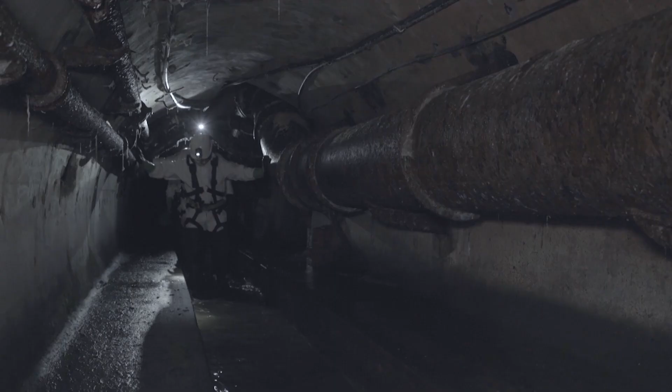This underground labyrinth spreads over 2,600 kilometers, the distance between Paris and Moscow. Hidden and mysterious, and completely unknown to most Parisians. It's a city beneath the city. Actually, underneath each street in Paris, there's a sewer that's accessible. It feels like entering the bowels of the earth.

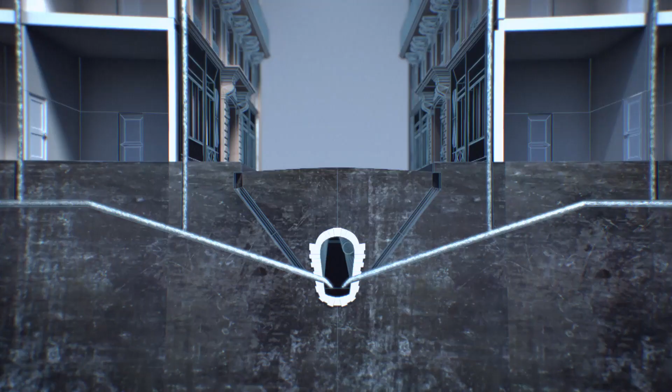Like the city above, the pipes below are always on the move. Every turn of a tap, every flush of a toilet, every minute of every day, Parisians depend on the waste they take away and the fresh water they provide. How does it all work so seamlessly?

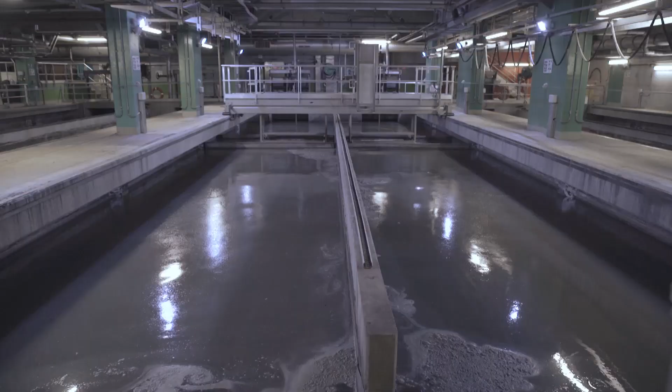Now, thanks to unprecedented access and computer-generated imagery, you're about to discover the secrets of the Paris sewers, where close to 6.5 million cubic meters of wastewater travel daily, equal to 70 Olympic-sized pools per hour. This massive infrastructure demands extraordinary equipment. From high-power flushing systems and huge reservoirs to century-old boats designed to clear sand.

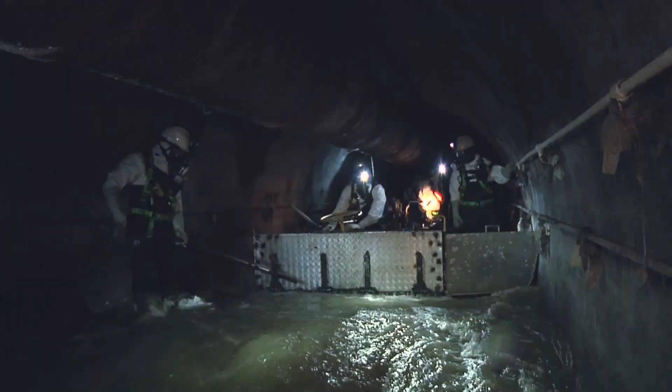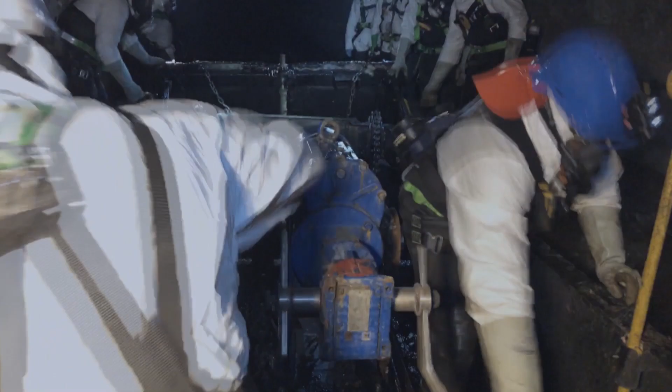The sewers are an undeniable part of the technical and urban legacy of Paris. The know-how and these extremely advanced constructions and machines have withstood the test of time. Since its creation in the 19th century, the modernistic sewers have transformed to keep pace with the vital city above.

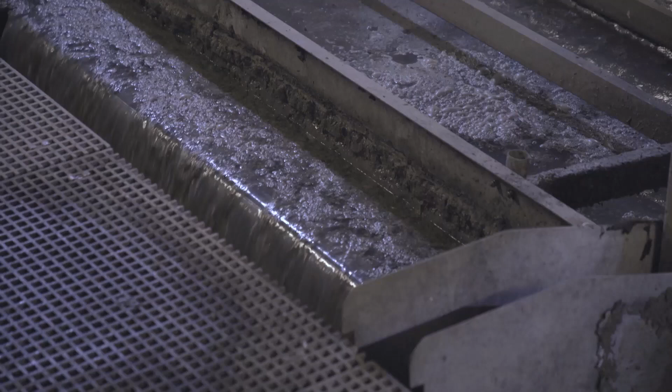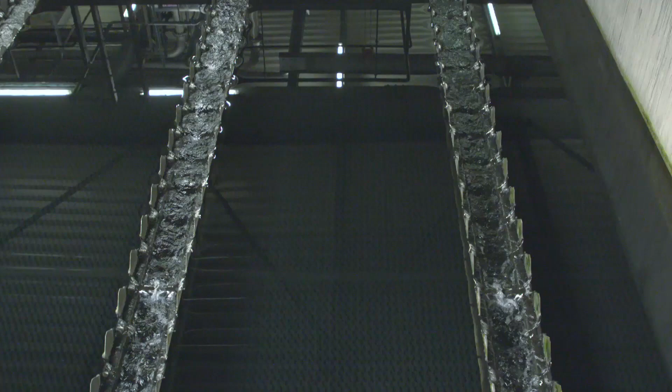Witness the elaborate techniques designed to deal with flooding, heavy rainfall, and provide high-speed decontamination. Nowadays, thanks to accelerated techniques used inside the plant, we're able to treat wastewater in just a few hours. From the collection of rainwater and wastewater to the distribution of drinking water, your sewer tour will take you on a fascinating behind-the-scenes adventure in history and technology. Deep inside the bowels of Paris, without getting your feet wet.

Every day in Paris, more than 2 million residents flush their toilet, clean their dishes and clothes, and take a shower. All this domestic water ends up in the sewers. This amounts to over 6.5 billion liters of wastewater that must be evacuated each day. Every hour, the equivalent of 70 Olympic-sized pools flows inside this invisible yet gigantic infrastructure.

In fact, the sewers are a network of tunnels mirroring the layout of the streets and boulevards above the ground. In total, 2,600 kilometers of galleries meander underneath the city. If they were put end to end, the sewers would cover the distance between Paris and Moscow. This extraordinary infrastructure serves several purposes. On top of collecting wastewater, these tunnels gather rainwater and prevent the flooding of Parisian streets when heavy storms occur.

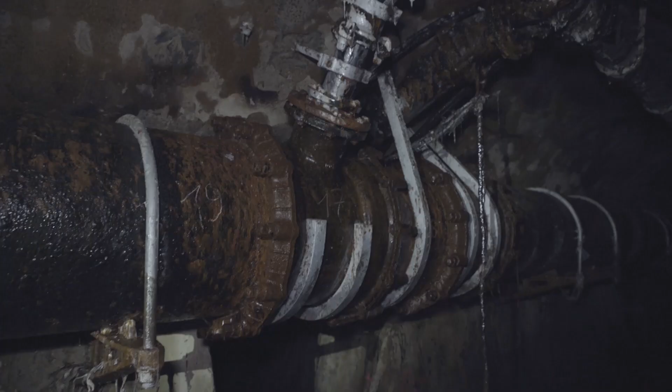This network also plays a crucial role in providing drinking water to local residents. The underground galleries host a 2,000-kilometer network of pipes distributing drinking water to every Paris household. Once used, this water returns in the sewer system located only 3 meters underground. Each building has its own evacuation outlet connected to a primary sewer that's about 1.3 meter wide.

This first link of the sewer chain then reaches a subcollector. The latter flows in a main collector between 4 to 6 meters in diameter, located under the big Paris boulevards. This system can be compared to what you have in nature, such as a source, a small brook flowing into a river until it reaches the sea. It uses the exact same process as the elementary sewer collects wastewater from a single outlet before flowing into a collector and finally reaching the sea, which is represented by the water treatment plant.

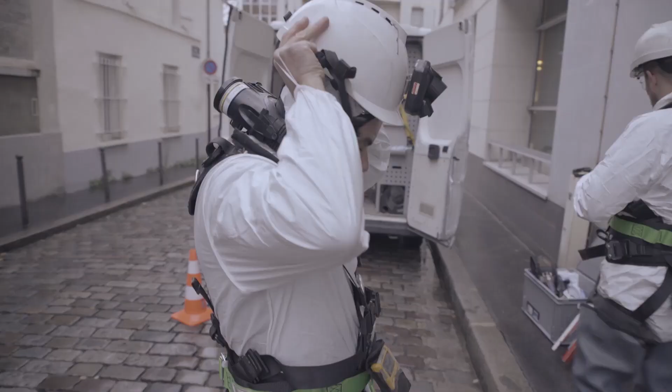The mission of the sewer system is to evacuate the wastewater of over 2 million Parisians, 24 hours a day, 7 days a week. In order to maintain this hidden network, city workers go inside the sewers on a daily basis. Sewer workers access the tunnels through one of the 20,000 manholes scattered across the sidewalks of the capital. Each lid weighs over 80 kilos. Under the pavement, workers find themselves in a confined space ruled by darkness and humidity. This hidden and mysterious part of Paris is completely unknown to most of its residents.

At first glance, the sewer network looks like a maze of alleys and narrow pathways. But in essence, this huge infrastructure is just a mirror of the city streets. Each street, avenue, and boulevard has its counterpart sewer tunnel. This 2,600-kilometer network provides every Paris building with a direct link to this intricate universe.

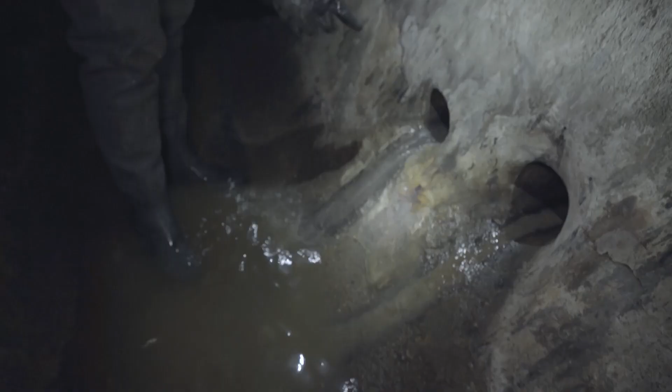Right now, we're under Rue Alésia. As you can see, sewer workers install signs to serve as bearings. Every building found above ground has its equivalent inside the sewer system. Here, we're under number 61 and 63. These are the two building outlets. Someone probably flushed their toilet or used water from this section of the building, which is now being collected.

Paris has a total of 100,000 such connections, linking every building to the sewer system. Wastewater from each building is gathered in a single evacuation pipe before being discharged in the sewers.

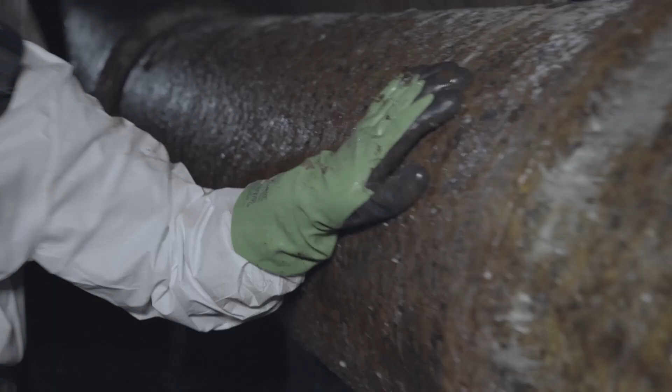In Paris, some 300 sewer workers are responsible for the safe flow of wastewater. Every day, they walk inside the bowels of the capital in order to maintain this gigantic network. These galleries are part of the historical heritage of Paris. They were designed over 150 years ago.

In the beginning of the 19th century, wastewater drainage was fairly rudimentary. As a result, whenever heavy rains would fall, black water would flood the streets, releasing a foul smell. Paris was at the mercy of the Seine River. So in times of floods, the river would commonly rise through people's cellars and the sewers, which caused the water to pour out onto the streets, carrying garbage, filth, and all the disgusting things traditionally found in urban settings.

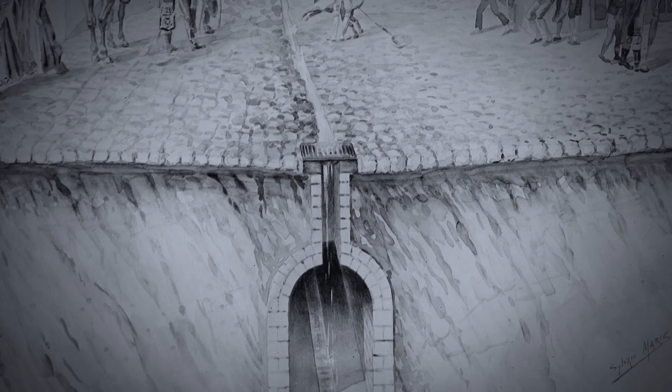In the early 1800s, Paris only had a few dozen kilometers of sewers at its disposal. There were hardly any sewers. Moreover, they were poorly designed and maintained. As a consequence, the city was, according to its residents, unpleasant for both the eyes and the nose. The poor drainage of wastewater caused several cholera epidemics, killing thousands of Parisians. This dire situation needed to be addressed.

The sewer revolution started with the arrival of Napoleon III and Prefect Haussmann. The city underwent an unprecedented transformation, both on the surface and under it. Wastewater had to be drained from the streets and the open air. They had to find a way to make it disappear, thus creating a clean city with tree-lined walkways and everything else featured in a typical modern city of that day and age.

For Paris to be worthy of its status as the City of Light, the streets had to be cleansed at all cost. The sewer system was quite important. Not only did the government want their city to be beautiful and bright, but also clean. And a sewer system was a key part of this urban planning that also carried a political aspect.

To clean Paris, Prefect Haussmann entrusted visionary civil engineer Eugène Belgrand with this ambitious mission. Belgrand's goal was to drain black water through a gigantic underground sewer system. Belgrand's idea was to develop an underground city planning far more advanced than before. He wanted to dig underground galleries able to collect a large amount of water, and in doing so, to develop a city on 2 levels. The scale of his project was quite utopic.

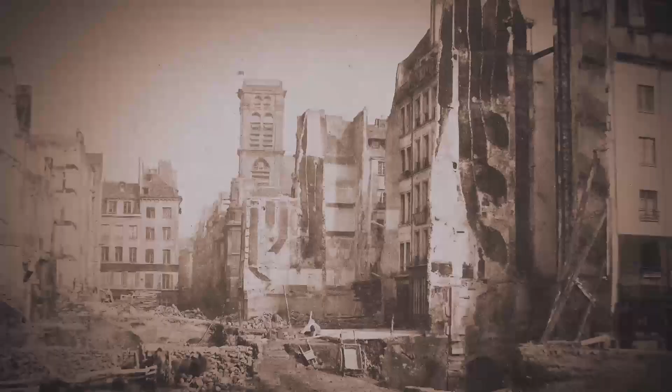To see their mission through, Haussmann and Belgrand undertook colossal work. Every street of Paris was successively ripped open and tunnels were dug. The work stretched over several decades and forever changed the face of the capital. By designing this huge underground infrastructure, Eugène Belgrand revolutionized the Paris sewers.

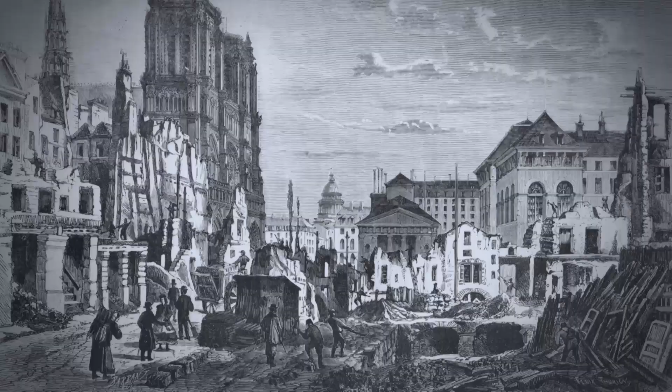In order to drain the capital's sewage, he imagined a gigantic network collecting both wastewater from every household as well as rainwater. Under the action of gravity, these waters would flow towards the northwest of Paris, thanks to the city's natural hills. The system works automatically, relying on the principle of gravity, and without any mechanical action. The use of gravity, therefore, makes pumping unnecessary, which is a very expensive and tricky system to maintain.

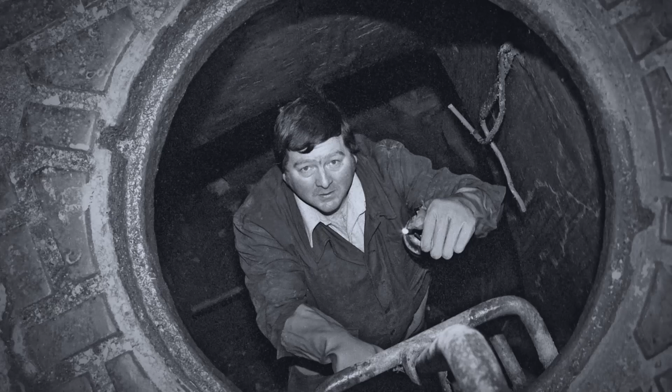Another feature that was unique in the world is that all the galleries were accessible, allowing sewer workers to walk freely along them. Belgrand was a visionary. He established his work's dimensions based on his prediction for Paris's growth and influence on the rest of the world. That's why he designed large, accessible sewers, which facilitated the maintenance work. A blocked pipe requires a lot of disruptive work above the ground. But when the sewers are accessible, we can go inside, take action, and find the source of the problem.

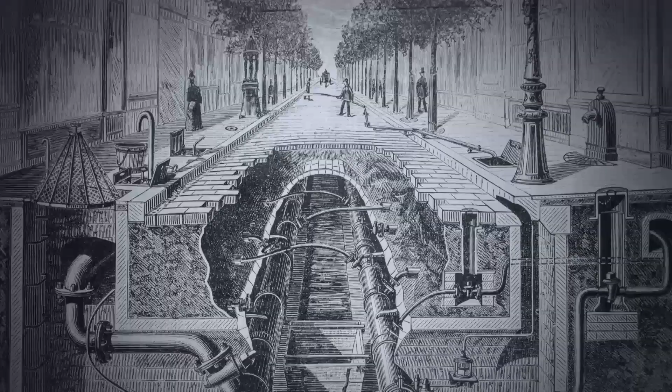In just a few decades, Belgrand and his successors accomplished colossal work. They built hundreds of kilometers of sewers, allowing the discreet drainage of rain and wastewater. But that's not all. In order to maintain and prevent waste matter accumulation inside this gigantic network, Belgrand had an original idea. He imagined a unique, spectacular system: cars and boats designed to travel inside the galleries and scrape the bottom of the sewers.

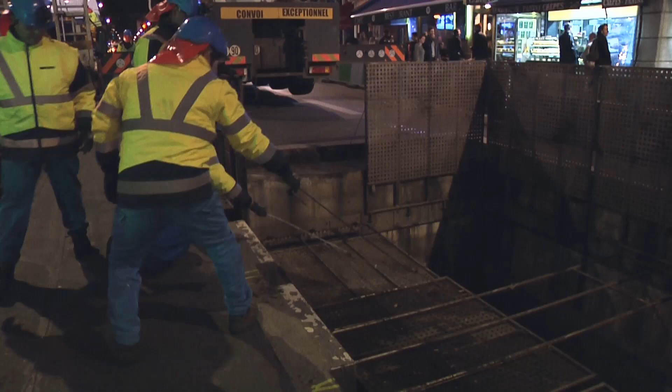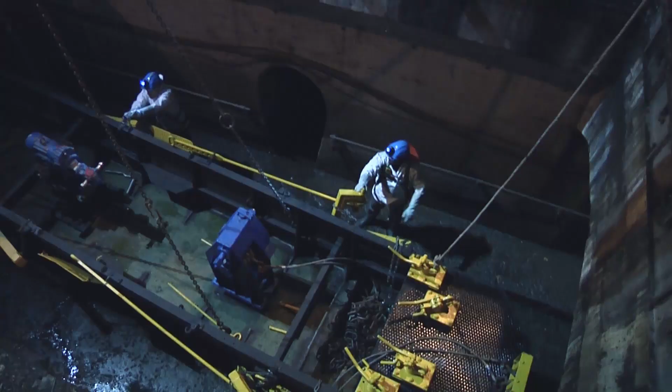To this day, sewer workers use these huge vehicles to go down the city's main collectors. Gate boats weigh almost 7 tons and measure 10 meters in length and 2 meters in width. This delicate operation is usually done at night to avoid disrupting city traffic. It takes 6 hours to lower a beast this size. Once inside the sewers, the scrubbing operation can begin.

When the boat comes to a heap of waste matter, it's blocked. Sewer workers then lower the gate. Moored with chains, the boat is lifted under the effect of rising water coming from the back. When the level of water is sufficient, the gate is swiftly opened. The flowing water removes the deposits and pushes them forward inside the tunnels.

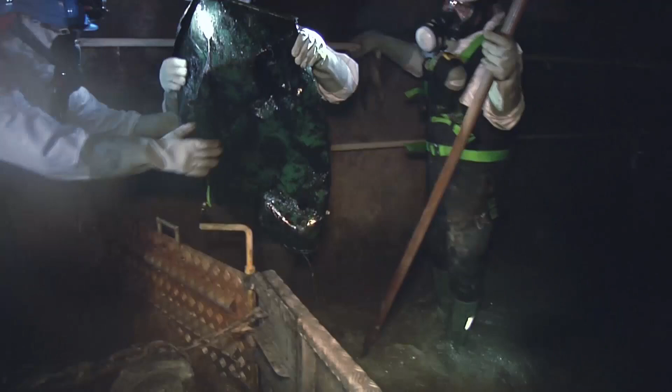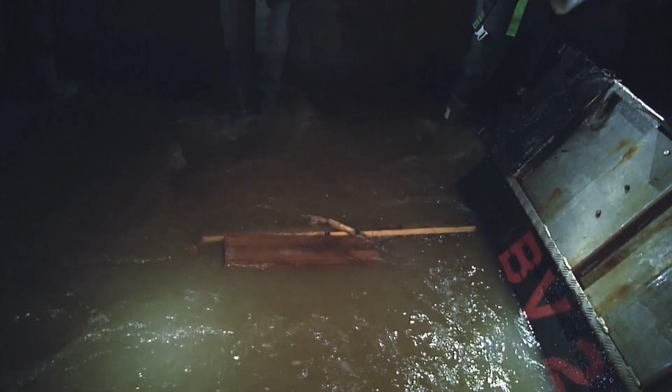This is how the boat makes its way inside the collector, stopping each time a heap appears or when it's blocked by any unusual object. Inside the collectors, sometimes we find wheelbarrows left behind by construction workers, cinder blocks, car tires, or tree grates like those you find around the trees in Paris. I don't know how they end up in the sewers, but we find them quite often.

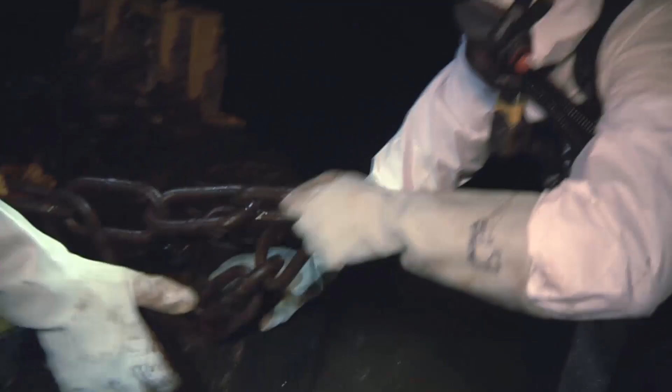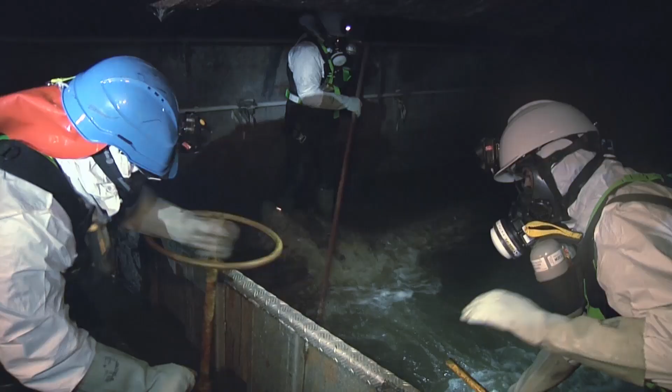This operation is very delicate. It requires the participation of 7 workers who must remain alert at all times in a noisy environment. The workers take turns during the entire operation. For example, the chains in the back of the boat weigh 80 kilos, so it's very demanding physically. It may not seem like it, but operating the gate is super hard.

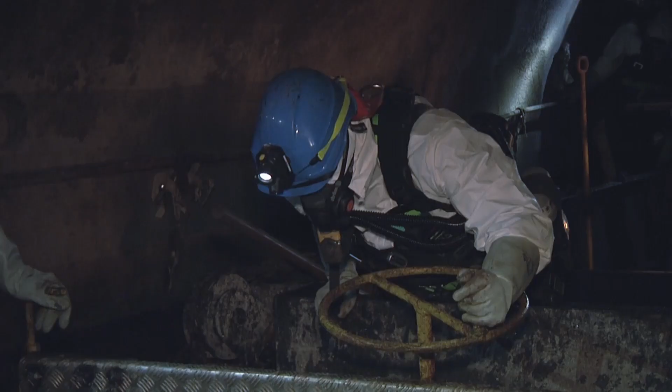Gate boat crews are actually navigating a 5-ton vehicle under the thrust of water. If they slip up and the boat starts going, it can't be stopped. The job requires a high skill level. These huge gate boats have been navigating inside the bowels of the capital for over a century. As it moves forward at a speed of 30 meters a day, the gate boat pushes the waste matter towards a sand trap.

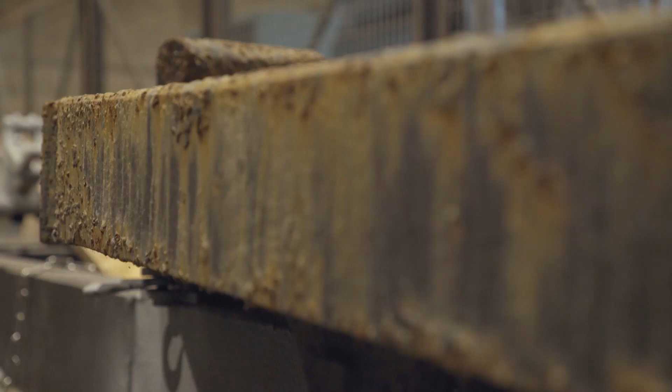About 100 such reservoirs can be found along the main collectors under the boulevards of Paris. On a regular basis, these huge sand traps are dried, emptied, and all the sand is sent to the waste process plant. The main goal is to maintain a quality network that works hydraulically. Every year, gate boats clear up close to 6,000 cubic meters of sand, which could almost fill 2 Olympic-sized pools.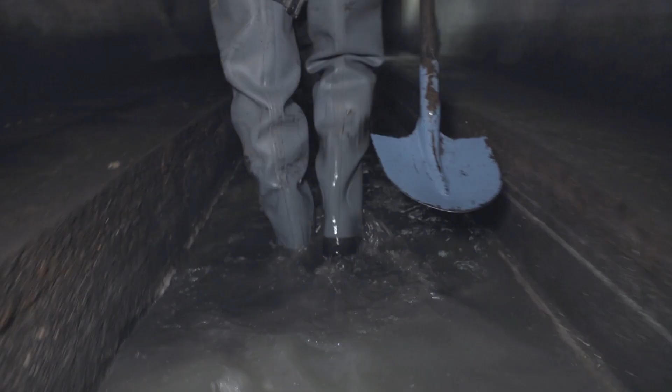Thanks to the visionary genius of its creator, its great dimensions and regular maintenance, the sewer system has successfully lasted over a century. The men working in the sewers today carry out the same operations their colleagues did 100 years ago. However, their protective gear has been improved, as the sewer environment can be dangerous.

Inside these dark, confined sewers, the main danger is invisible. In some places, solid substances accumulate and decompose, thus creating potentially lethal gases. One of the most dangerous is hydrogen sulfide, which stems from the decomposition of organic matter. But there's also carbon monoxide and methane, a highly flammable gas.

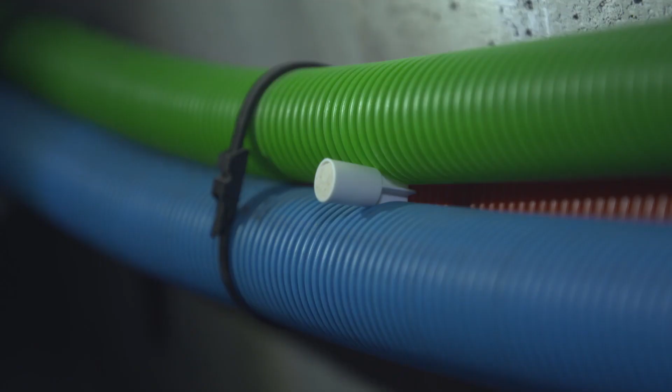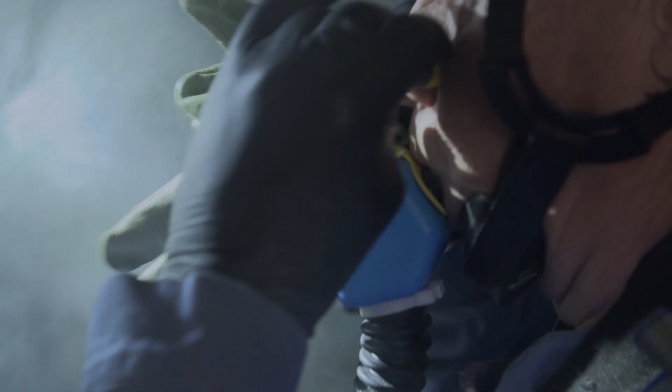Whenever the presence of gas is detected, developing accurate reflexes is vital. Sewer workers must precisely know how to use their protection gear. To that end, they go through rigorous simulation drills on a regular basis. A control box sets off an alarm after detecting the presence of abnormal gas. In order to shield themselves from this potentially deadly gas, workers must put on their masks as quickly as possible and protect their respiratory systems.

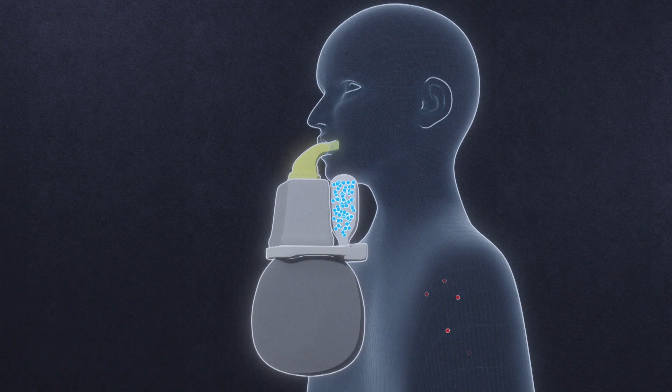They're equipped with self-rescue masks that provide them with 30 minutes of air supply, which is more than enough time to exit the sewer. These emergency masks come with a small compartment containing a supply of compressed oxygen. As soon as the mask is in place, the oxygen is released, allowing the user to safely breathe through a self-contained device without any outside air supply. This great innovation ensures the survival of workers when confronted with lethal gases.

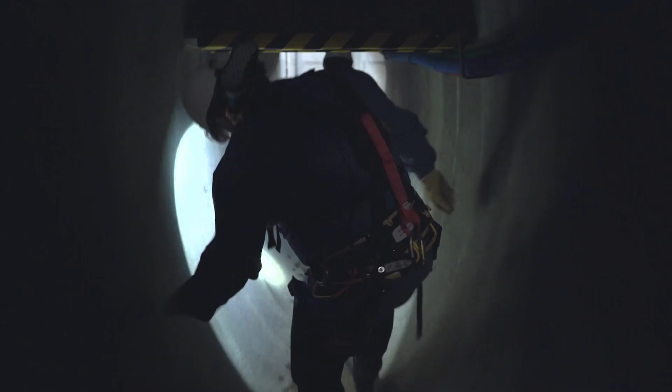Between suspended matter, gases, bacteria, and fungi, the dangers are many. Our biggest enemy inside the sewers are gases and bacteriological hazards. We're working inside a huge pipe filled with feces, filth, and many other horrible things. Breathing it in or being in contact with it involves serious risk. It's an extremely difficult job.

These days, sewer workers are not the only ones working inside the bowels of the capital. Other technicians also go down these tunnels. The sewer system doesn't only drain wastewater, it also serves as a technical gallery, hosting the internet wiring and streetlight power cables. What's even more surprising is that it hosts the entire city's drinking water supply line.

These drinking water lines are installed on the roof of the underground galleries. In total, a 2,000-kilometer piping network runs across the sewers in order to supply each and every building. This parallel network was designed and conceived at the same time as the creation of the modern sewer system 150 years ago. Up until the end of the 19th century, certain Parisians still got their water directly from the Seine River. But back then, the water was contaminated.

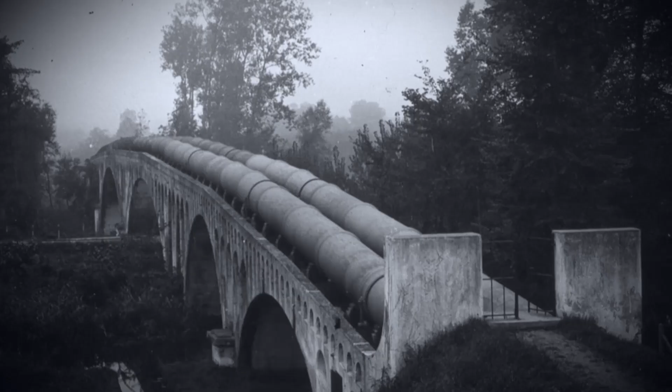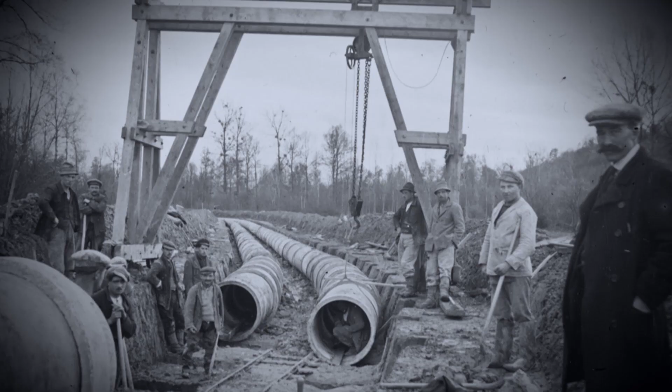The engineers started by locating several water sources within a 150-kilometer radius around the city. But drawing water was not all. It needed to be transported all the way to Paris. Inspired by the Romans, Belgrand had a gigantic aqueduct network built in order to carry water over huge distances. In these monumental structures, the water simply follows the natural inclination of the land until it reaches the bottom of the Paris area. It flows from the source under the action of gravity, all the way to the edges of the capital. Then, the water runs along the pipes inside the sewer network.

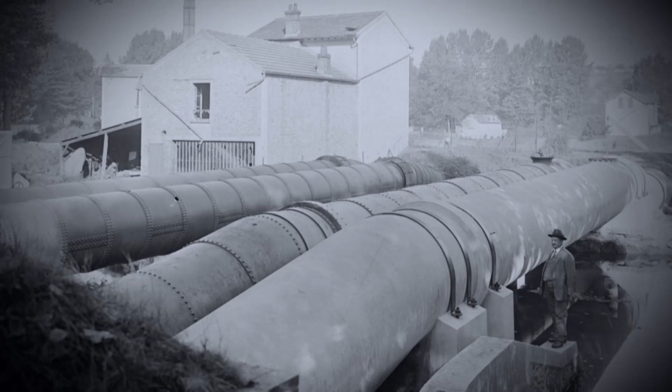Belgrand used the principle of gravity. In other words, the water flowed towards Paris because it came from a higher ground. He used the topography of the Parisian area, which was not only relevant, but it also contributed to the system's resilience, as evidenced by the fact that it still provides half of the water consumed in Paris. This colossal worksite, built in parallel with the construction of the Paris sewers, lasted about 40 years. The work was completed well after Belgrand's death in the early 20th century.

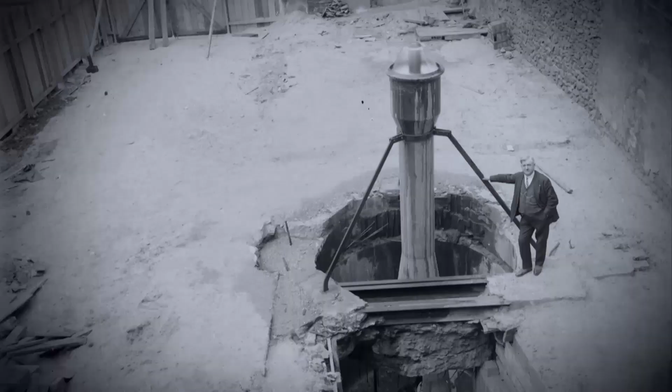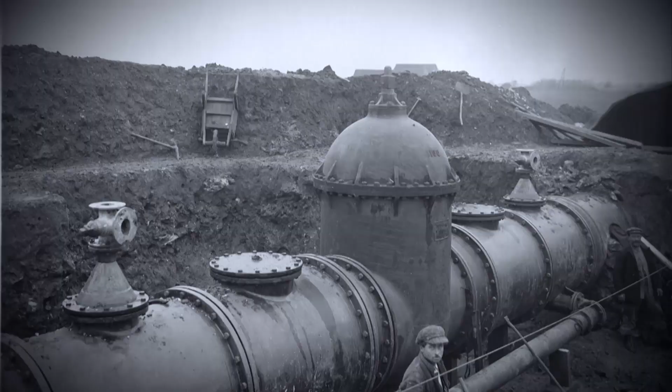The work accomplished by Belgrand and his successors is remarkable. In total, 470 kilometers of aqueducts were built. To this day, these structures bring water drawn from about 100 intake points all around Paris. Finally, the drinking water is distributed to Parisian households, thanks to some 2,000 kilometers of pipes installed inside the sewer network. At the time it was designed at the end of the 19th century, this unique network, used both to drain wastewater and to distribute drinking water, was a genuine innovation.

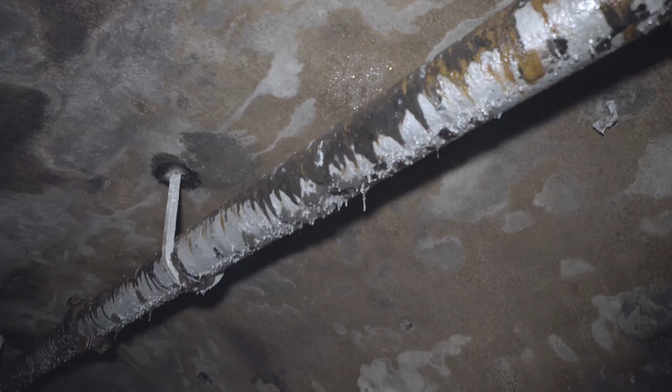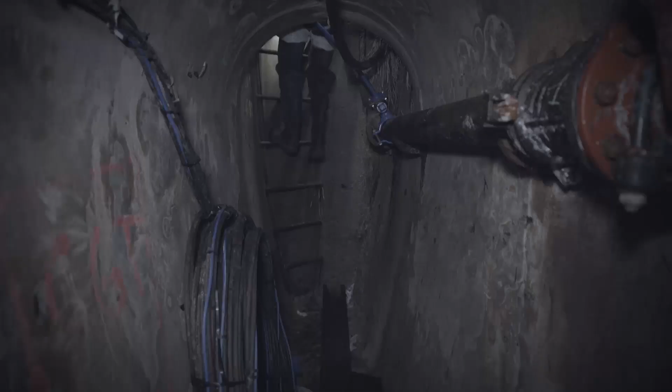The most remarkable thing about Belgrand's system is its longevity. To this day, Eau de Paris uses the network that was designed and built by Eugène Belgrand and his successors. Today still, the sewer network plays a key role in the distribution of drinking water across the capital. This joint system offers a tremendous advantage, as the pipes are accessible from inside the tunnels. In the event of leaks, or simply to maintain the pipe network, the city doesn't have to rip the streets open or hinder traffic. City workers have direct access to the sewers.

The drinking water pipe network hangs from the ceiling. Water travels inside 2,000 kilometers of pipes inside the sewers, distributing water to every building and fire hydrant. Every so often, the pipes start to leak and need replacement. Despite the proximity between the drinking water and wastewater networks, there is a zero risk of contamination. The pipe is under pressure along its entire length. There are no weak spots. We're absolutely positive that nothing can enter the pipe. No foreign body can get inside.

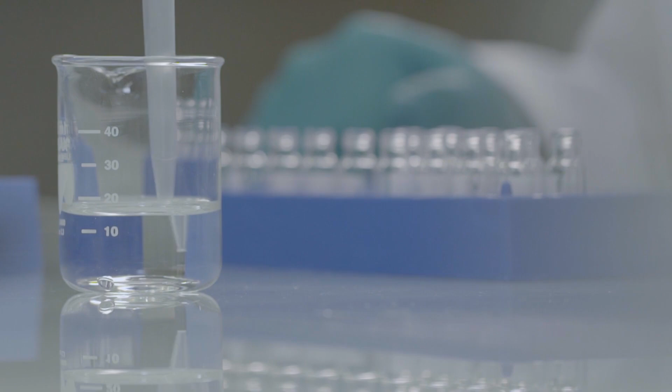Water is the most closely monitored consumer good in all of France. In Paris only, it undergoes over 1 million tests every year. These are done through all the stages of the distribution, well before the water reaches the sewers. Every measure is taken to ensure water of the highest quality. Before traveling inside the sewer system and reaching Parisian households, the water undergoes a series of treatments.

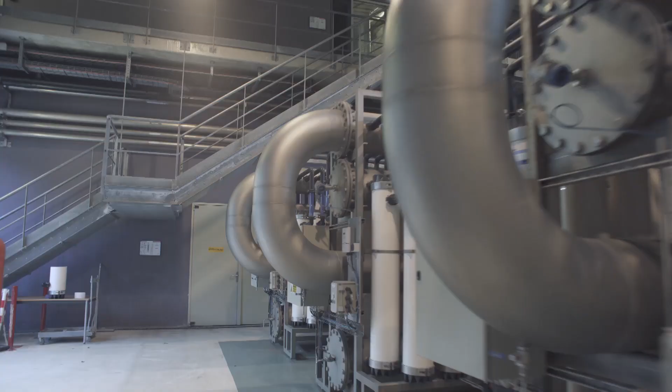Some are done here, at the water treatment plant of L'Haÿ-les-Roses, just south of Paris. This gigantic facility collects underground water from the Sens region. The state-of-the-art plant produces 110,000 cubic meters of water every day, which amounts to 1/5 of the capital's drinking water needs.

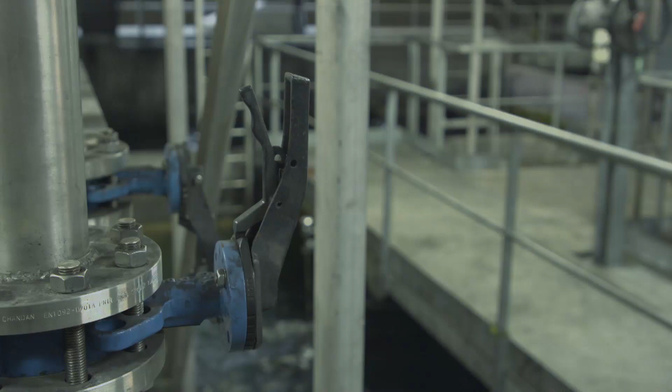When it reaches the plant, the water seems clear. However, it contains several substances invisible to the naked eye and potentially hazardous to our health. The water is already clear, but it's not clean enough to drink. In fact, it contains materials such as ground minerals, bacteria, and parasites. These elements, together with pesticides, will be eliminated through a thorough treatment process.

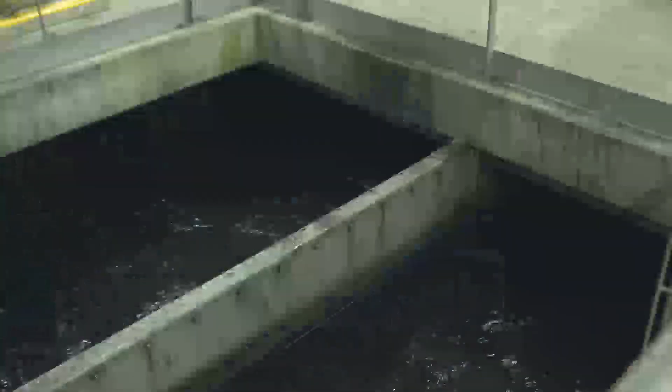The first part of the treatment involves pouring the water inside huge tanks saturated with carbon powder. Active carbon is highly porous and attracts, just like a magnet does, a great number of suspended particles, such as pesticide residues. The water is then relieved of these substances through a settling process before being sucked up and sent to the second stage of purification.

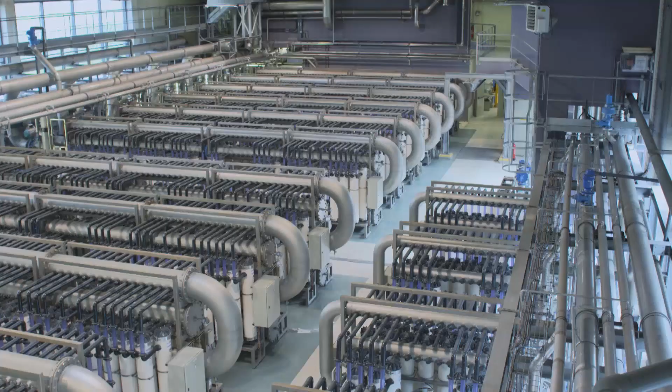When water reaches this gigantic room, it's pushed under high pressure inside one of these white units. This is the ultrafiltration stage. Ultrafiltration is actually a mechanical filtration. In other words, it uses the same principle as a sieve or a coffee filter, but in this case, the mesh is very small, only 0.01 micrometer. This means we catch any particle bigger than 0.01 micrometer.

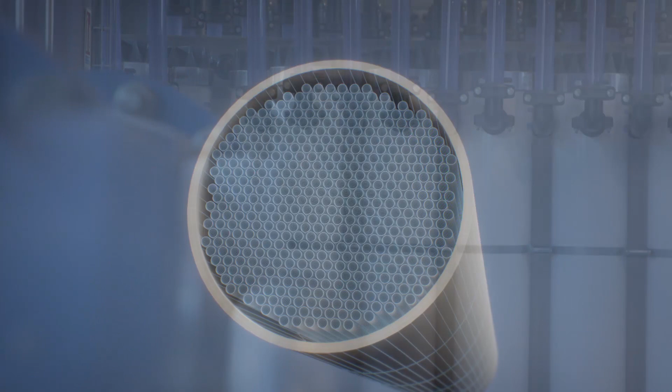Each unit contains about 100 tubes. These tubes are made of punctured membranes. The hole size is 0.01 micrometer, which is 10,000 times smaller than skin pores. That means no bacteria, virus, parasite, or any organism can go through this barrier.

The total surface area of this ultrafiltration plant equals 66,000 square meters, meaning that our process is highly concentrated. If we were to build it with a different technology, the equivalent of this room would require a surface area between 60 to 70 soccer fields, which is substantial.

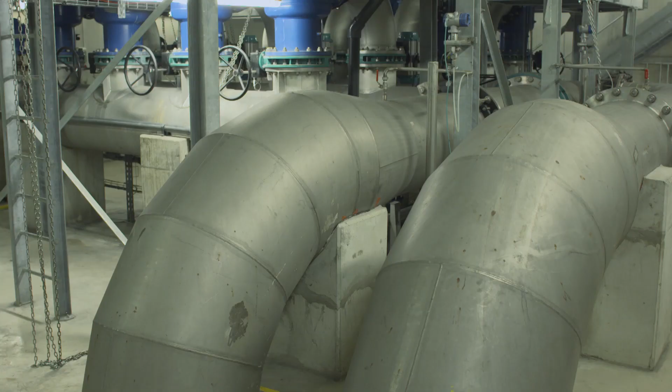After this stage, the water is almost drinkable. It has been freed of all the undesirable substances, but it still contains minerals. During the last step, a small amount of chlorine is added. This will preserve the water quality during the entire time of its storage and transportation. This step is absolutely necessary before the water can travel inside the pipes across the gigantic Paris sewer network.

Nowadays, half of the water consumed by Parisians comes from underground sources treated in purification plants located close to the aqueducts. The other half is drawn from the surface waters of the Marne and Seine rivers, which are also treated in plants surrounding the capital. By multiplying the supply sources, Paris is able to meet the needs of all of its residents.

This creates an extremely strong and resilient system while ensuring its resistance in the event of a crisis. This is all thanks to the 5 different vectors made up of 3 underground sources and 2 surface waters, the Marne and the Seine rivers, allowing us to produce twice the actual daily needs of Parisians.

When it comes out of the treatment plant, the water hasn't reached its destination yet. Before traveling along the sewer network to be distributed inside the homes, it has to be stored in one of the 5 main reservoirs of the city. These are huge covered pools, and the most emblematic is located in the 14th arrondissement.

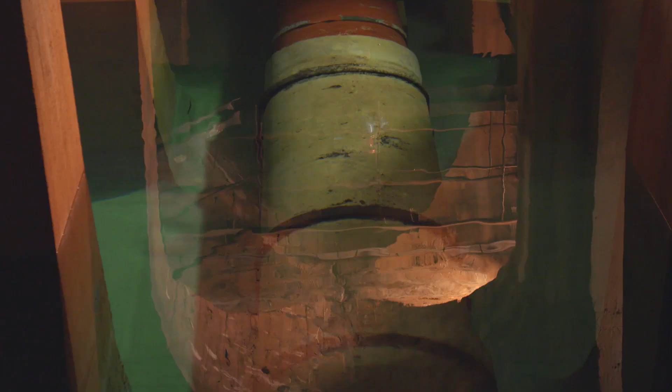The names of the various sources throughout the years are inscribed on the walls. The water is then distributed to the compartments of the reservoir, where it is kept at the same temperature as the source, 12 degrees Celsius. The water level varies depending on the time of day and the demand.

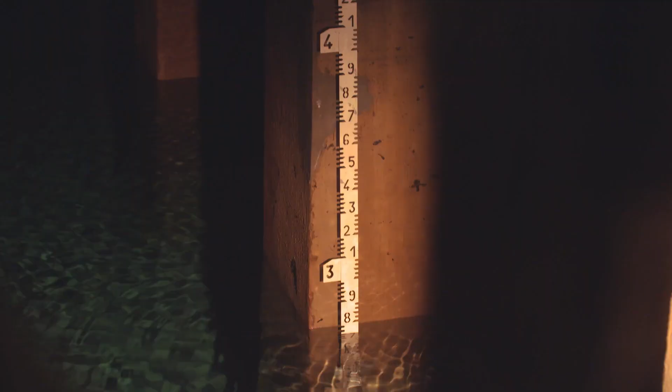The Montsouris reservoir level, just like all reservoirs in general, reaches a consumption peak every morning between 6 and 8 a.m., when most people get up, clean up, and use water. Once the consumption peak has passed, the reservoir is slowly emptied as the day goes by, before being filled up again during the night, thanks to huge custom-made gates.

The water from the Montsouris Reservoir flows directly inside the pipe network that travels along the sewers of the capital. It discreetly distributes water to each building from galleries under the pavement. To anticipate the demand, the network is equipped with thousands of sensors distributed along the entire water path, from its production to its distribution through the Paris sewers. Every day, these sensors collect millions of data that are analyzed in real time at a control center.

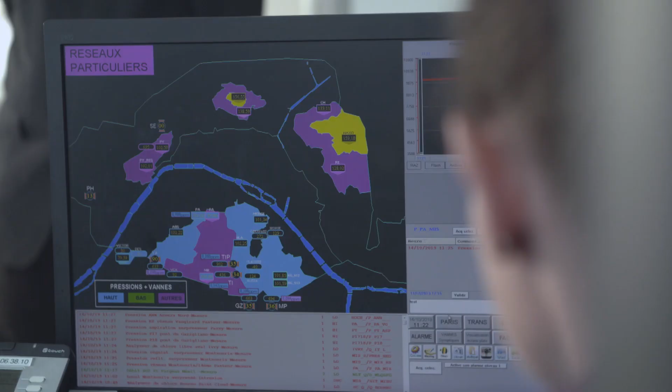In this ultra-secure room, agents remotely coordinate drinking water stocks allocated to the capital. They monitor the entire network in real time, including the 2,000 kilometers of underground pipe network within the sewers of the city. Inside this control tower, the dispatchers take turns 24 hours a day to meet the needs of the Parisians.

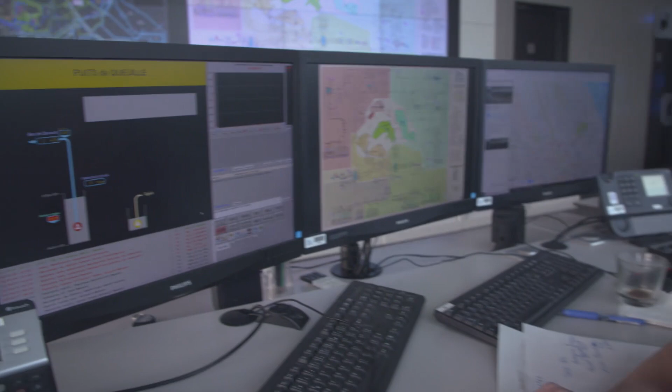Here, we process 19,000 variables, which amounts to millions of data points each day, and we're able to remotely control most of the facilities. On a daily basis, our dispatchers open the gates inside the network to increase pressure, fill reservoirs, and allow a more efficient storage. Their only goal is to ensure water distribution to every Parisian at all times, 24 hours a day.

On top of ensuring constant distribution of drinking water, the agents must also guarantee an even pressure in every faucet, which is set at a minimum of 2.5 bars. In the lowest neighborhoods of Paris, this pressure is reached naturally, since the reservoirs are located on higher grounds. The water flows directly under the effect of gravity. It's very environmentally friendly, as we don't need any driving force to push the water and guarantee its pressure.

In Paris, most reservoirs are situated on high ground at an altitude of about 25 meters. At their outlet, water is released at a pressure of 2.5 bars in the pipes located inside the sewer network. This pressure is sufficient to distribute the water to the buildings of the lowest neighborhoods of the city, all the way up to the 7th floor. Each day, close to 500 million liters of water are dispensed all around Paris.

On top of managing the drinking water, the Eau de Paris agency also ensures the distribution of non-drinkable water across the capital. This water is drawn directly from the Seine River and the Canal de l'Ourcq. Once filtrated and rid of its plant residues, this raw water travels through 1,700 kilometers of pipes that are also tucked inside Paris's sewer network. This ingenious system is once again the brainchild of Eugène Belgrand. The distinctive feature of the sewers is to house a double underground network providing both drinking and non-drinkable water.

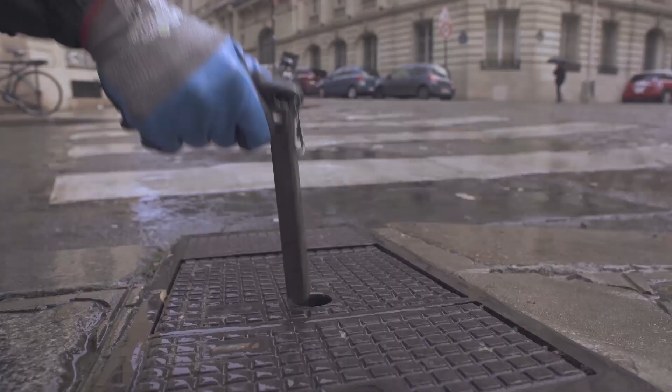This one-of-a-kind network for non-drinkable water is used to water gardens and supply decorative fountains. This non-drinkable water also plays a key role in the maintenance of the streets and sidewalks of the city. Every morning, cleaning crews open water supply gates. Over 17,000 such gates are scattered across Paris. The streaming water clears the gutters, carrying leaves and other trash in its flow. These water gates are also used to fill street cleaning trucks.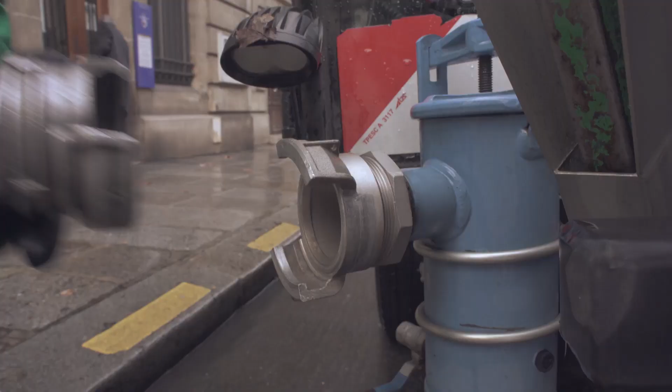The tourists who visit Paris are often surprised to see water flow along the sidewalks. They wonder what it's used for. They sometimes think it's being wasted. In recent years, we've been criticized on Twitter and told it was unacceptable to waste drinking water because it's a rare and valuable resource. But in reality, it's not drinking water. It's drawn directly from the Canal de l'Ourcq, or the Seine River. In that sense, it's very environmentally friendly since this water isn't wasted. It ends up in the sewers, where it helps evacuate black water.

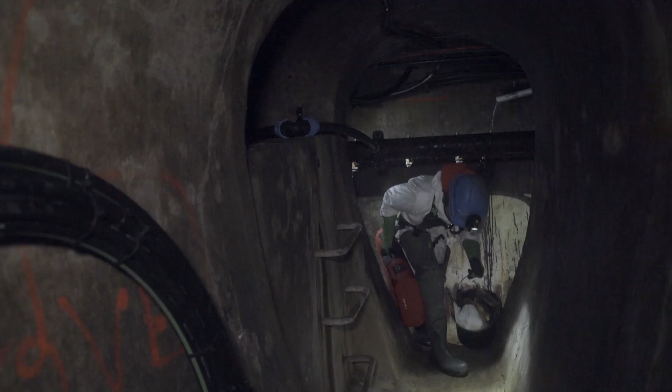The vast majority of the streets of Paris are on a slope. Therefore, the cleaning water flows naturally along the roads before ending up in the closest drain. This is how rainwater and cleaning water flowing inside the sewers facilitate the evacuation of wastewater. But it's insufficient to maintain the network, which is regularly blocked with sand. On top of the imposing gate boats, another ingenious system was implemented at the end of the 19th century. A flush cistern.

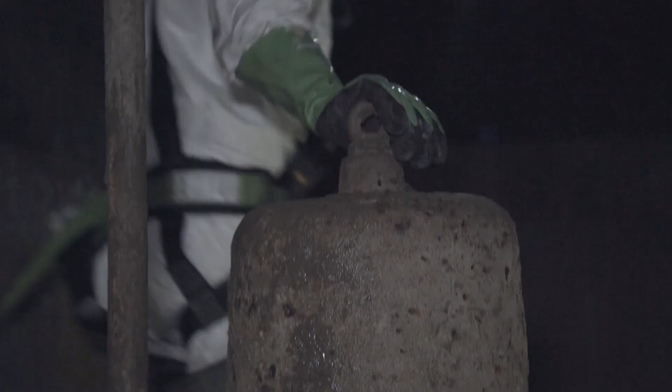Several hundred tanks containing non-drinkable water are scattered across the network and regularly maintained by sewer workers. 1, 2, 3, right here. Let's put it over there.

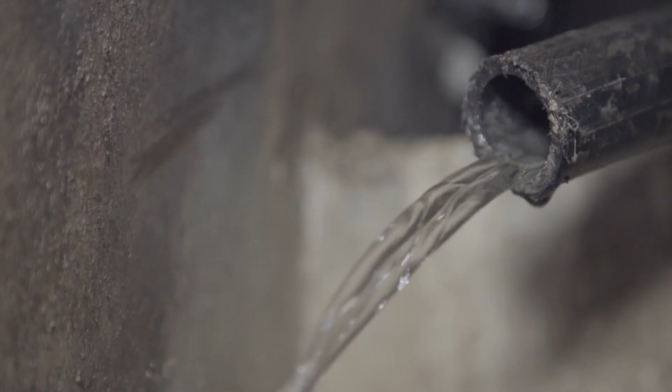It's a preventative measure to avoid potential organic matter deposits or rat traps. It creates a flushing action. It also contributes to better ventilation and keeping the tunnel generally clean, while helping the cleaning crews when they need to work on specific problematic sections.

Several times a day, these reservoirs fill up and release an average of 5 cubic meters of water. This fast, pressured water helps clear out the smaller sewers on a daily basis, while contributing to their cleaning. In fact, it's a bit like the one you have at home. It's basically the extra large version of a toilet flush.

Thanks to the water drawn from the Canal de l'Ourcq and the Seine River, the sewers are almost self-cleaned. The non-drinkable water network hence plays a key role in evacuating the wastewater through the 2,600 kilometers of tunnels underneath Paris. But when heavy rain strikes, water can become a dangerous enemy.

When significant storms occur, all the rainwater falls inside the gutters and combines with wastewater to block the sewers. The water level can thus rise dangerously and saturate the network. When it rains hard, rainwater is added to wastewater, and this can cause a flood. The tunnels are pretty large, but rainfall can still be very intense. And in that case, Paris could be flooded.

So in order to protect the more vulnerable neighborhoods, a drainage system was designed a very long time ago to make sure that the excess water, named the overflow, is poured into the Seine River by what we call a spillway. Paris has 44 spillways, which are galleries linking the sewer network to the Seine River.

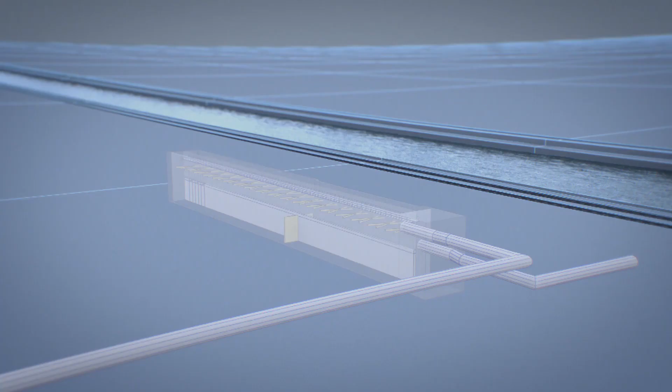Since wastewater is highly polluting, huge underground reservoirs were built in the 1990s to prevent the overflow of black water in the Seine. They're located along the river, like this one under Parc de Bercy in the 12th arrondissement. This gigantic storage facility comprises 4 compartments measuring 200 meters long and 13 meters wide.

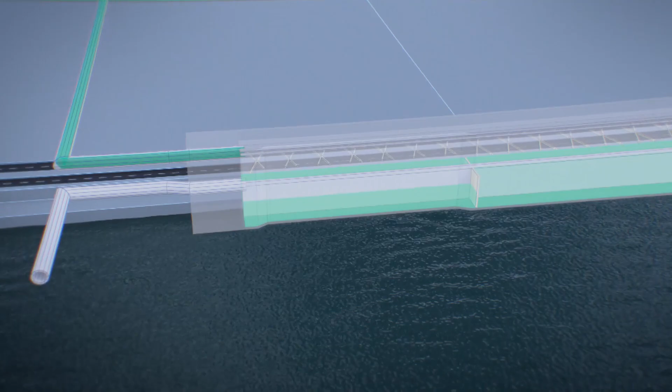In case of heavy rain, the 4 pools can store up to a total of 17,000 cubic meters of water from the sewers, which is the equivalent of over 4 Olympic-sized pools. After the storm, all this water simply returns inside the sewer network to be brought to the purification plant, where it will be treated under the appropriate conditions.

Nowadays, every possible effort is made to protect the quality of the Seine River. Thanks to its many strong structures, Paris can keep over 142,000 cubic meters of wastewater in case of heavy rains, the equivalent of 38 Olympic-sized pools. Over the span of 20 years, this system has proved its worth. It has lowered the volume of water discharged in the Seine River by 90%. Today, environment protection is the #1 priority.

At the end of its journey, after traveling through hundreds of kilometers of tunnels under the capital, the wastewater is transported to the plants located in the northwest of Paris. The sewer network reaches its destination in huge water treatment plants, such as this one in the city of Colombes. Every year, this gigantic plant treats the wastewater of over 1 million residents.

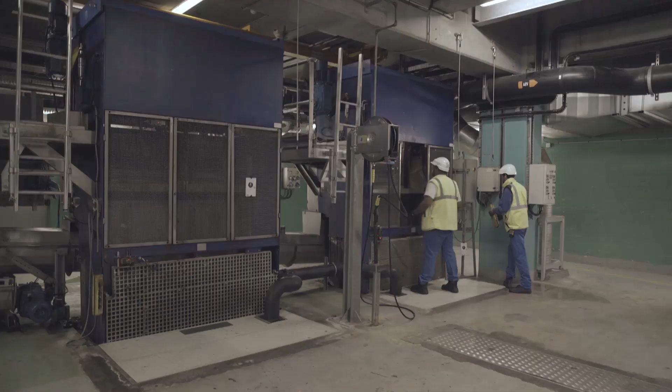One of a kind in Europe, it has the unique characteristic of being mostly buried. Indeed, 2/3 of the facility are hidden underground. Here, sewage water undergoes a real shock treatment. The first step is to eliminate coarse waste such as plant residue, wipes, or pieces of plastic. All this trash goes through huge filters.

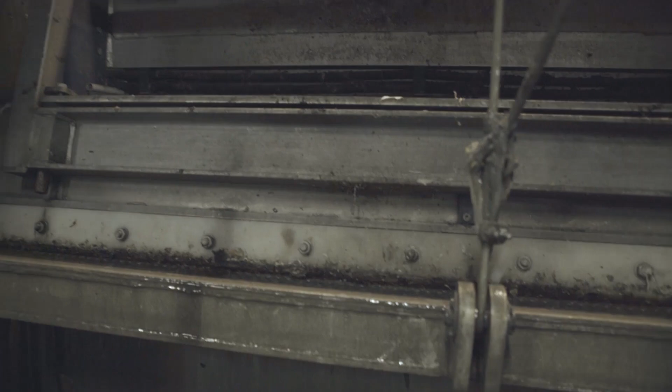These are meshes of various size that catch the waste, compress it, wring it out before sending it to a treatment plant. After going through the filters, the water continues on to huge settling tanks. In the Parisian region, there are construction sites all year round. This causes granulated materials and mineral deposits.

The more general term is sand, which is retrieved in a desander. As we slow down the water flow, these materials settle at the bottom of the desander, where we retrieve them. These huge compartments serve 2 purposes. They allow workers to fish out the heavy sand sinking to the bottom of the tanks. And simultaneously, grease rises to the surface and is collected with enormous scrapers.

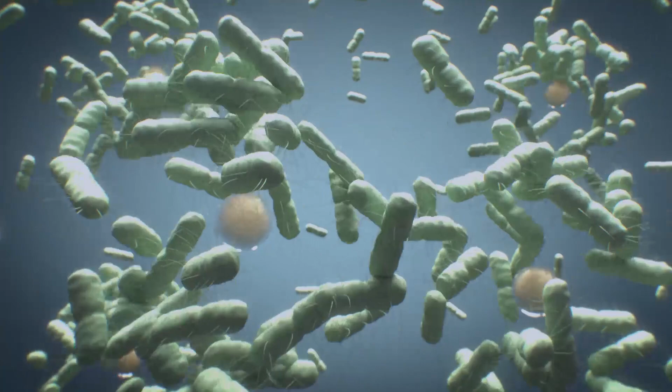The water is now rid of the more apparent waste. But it still contains numerous invisible substances derived from organic matter, such as carbon, phosphorus, and nitrogen. In order to capture these dissolved elements, water undergoes 2 types of shock treatments. A first chemical treatment captures the carbon and phosphorus molecules. Then, water is put into contact with millions of bacteria that digest the nitrogen found in urine. This step is called biofiltration.

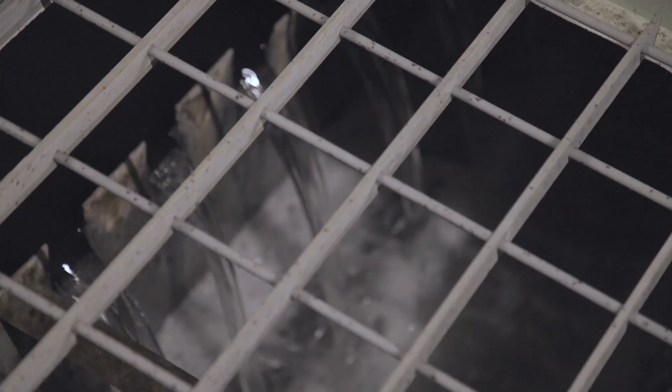After these chemical and biological treatments, the water is completely purified, and in record time. Each drop of water is treated in just 2 hours before being returned to the Seine River. The sewer system and the advanced performance of wastewater treatment both contribute to the improvement of the ecological state of the natural environment of the Seine and Marne rivers. Today, we notice that fish life is growing more and more as we discover new species every year.

Thanks to the improvement of purification techniques, the waters thrown back in the Seine River present no risk to aquatic life. Each year, several billion liters of water are returned to the natural environment. These days, the entire sewer system, from the wastewater collection to its purification, is studied in order to ensure the protection of the environment and possibly even change it into a reusable resource. What if sewage could become a source of energy?

For the longest time, sewage was a waste, and it had to be kept underground, which is why the system was designed this way. But today's reflections are a bit more open, and we consider that the sewer system could be used for things other than just evacuating waste, even though it must obviously maintain its primary function. When it comes to sewer systems, wastewater can indeed be used to heat buildings. By installing a heat exchanger in the sewers, it's possible to heat the nearest building through an adapted heating system.

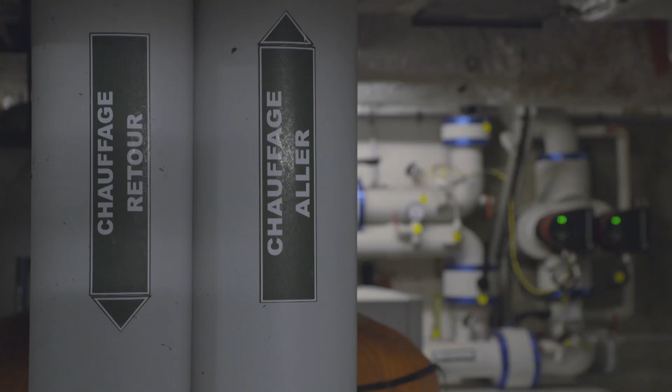Retrieving heat from the sewers to heat up buildings is the astounding innovation that's been implemented in the capital since 2016. The water inside the sewers has an average temperature varying between 14 and 20 degrees Celsius, thanks to the hot water drain from bathrooms, but also washing machines and dishwashers all around the city. With a heat exchanger, it's possible to recover this valuable heat from the sewers. Today, this ingenious system is notably used to heat public buildings, as well as a pool located in the 14th arrondissement of Paris.

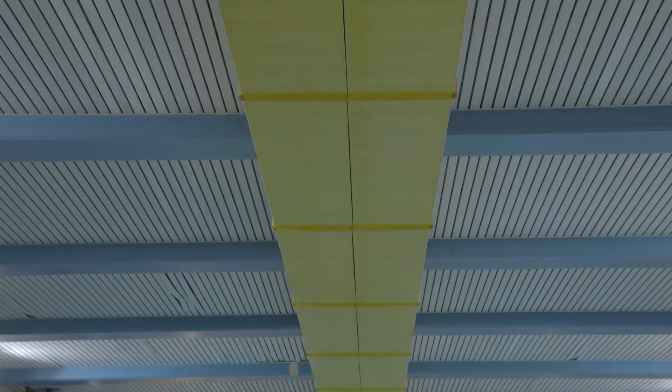The heat pump located in the pool's basement is used to heat the showers along with the pool itself at a temperature of 26 degrees. The first feedback we received was that this system is ideal for pools because they need a permanent heating system. It makes this particular one very interesting. The city's strategy is to develop this energy source by extending its use to more and more sites. By retrieving the heat emitted by the sewers, this pool lowered its electricity bill by 70%. In the years to come, several schools and public buildings will be equipped with the same system. The Paris sewers are therefore about to become a significant renewable source of energy.

Thanks to the architectural feat and the visionary ideas of Eugène Belgrand, the Paris sewer network was able to endure through centuries. Looking back, we have to admit that they were incredibly visionary builders who created a system that remains in use today. And what happened? Other cities have had to renew their equipment much more often, while the Paris system has been working since the 19th century without needing any significant changes. Seeing that these infrastructures are more than a century old allows me to say that the sewer system is part of Paris's heritage. As time went by, the Paris sewers were upgraded in order to keep fulfilling their mission, all the while protecting the environment as much as possible.